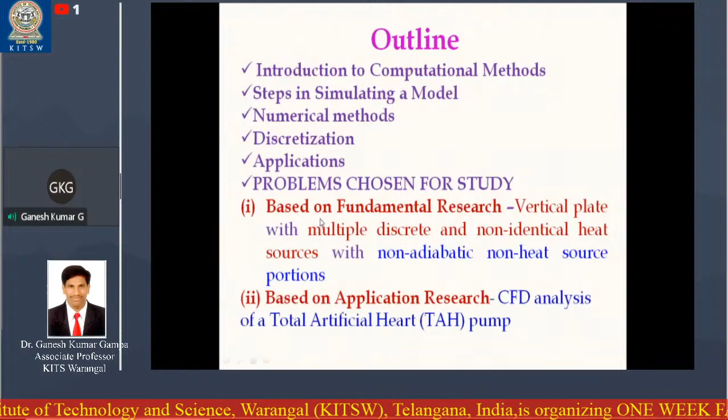Teachers, the outline, keeping in view the junior faculty as well as senior faculty, I'm going to take this brief session considering the introduction to computational methods, steps in simulating a model, numerical methods, discretization, applications. Here I'm going to discuss various problems pertaining to computational fluid dynamics, one based on fundamental research and other based on application research.

First of all, we should understand why computation is required. As we know, nowadays computational methods have become very important, and very exhaustive studies and works are going on in computational studies. The main reason for this is that conducting laboratory experiments is very costly, time consuming, and sometimes impossible. Hence, these methods are used to optimize.

Statistical soundness, and it is used to study heavy systems for which theory is hard, through numerical simulations. Nowadays whatever application, wherever you use it, whether domestic or industry, you can see the applications pertain to purely mechatronic components. A simple fan, in olden days it was a mechanical component, but now we can see it has become a mechatronic component.

And almost all engineers have to come together, and they are doing wonders in this world. So from this I can say that mechanical engineering alone cannot do any project by itself. An interdisciplinary approach is required for studies or making any product in this world. Hence, this computational method is also one of the methods where it brings all engineers together and makes the wonders happen. You can see here how useful these computational methods are, to whom they are useful — I can say it is useful to all engineers.

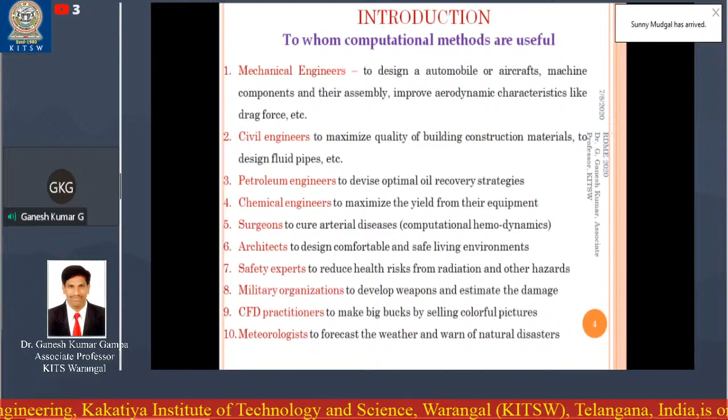The main problem with mechanical engineering automobiles is heating, or heat generation. Heat dissipation has become one of the greatest challenges in this world, not only in mechanical automobiles but also in aircrafts, and it has become more challenging in electronic components. This is where mechanical engineers come into picture, where we need to decrease and dissipate the heat generated in the systems as much as possible to increase the life of the component.

For civil engineers also, computational methods are used to maximize the quality of building construction materials, to design fluid pipes, etc. For petroleum engineers, it is suitable to devise optimal oil recovery strategies. For chemical engineers, it is used to maximize the...

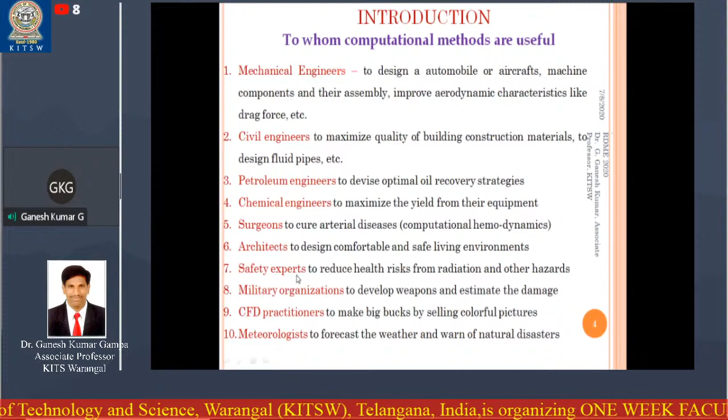Coming to surgeons, you can see nowadays total medical research is playing a very important role, and almost all medical applications are mechanical and electronic applications. Like if you take a simple ECG machine, in olden days it was mechanical, but nowadays again it has become a mechatronic component. So all the engineers have to come together so that we can do miracles.

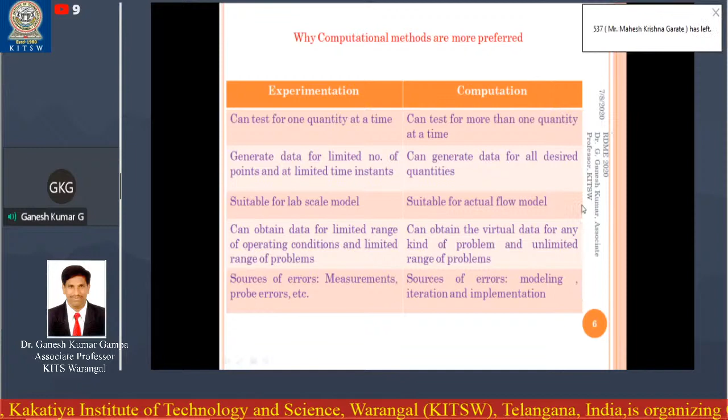What is the difference between computational methods and experimentation, or what are the advantages or limitations of each? The main advantage of computation is we can test more than one quantity at a time, whereas for experimentation, only one quantity at a time can be tested.

In case of experimentation, we can generate very less data, whereas in case of computational methods, almost all desired quantities are possible if the coding is performed well, if you are expert in coding.

In the lab scale, we can have only one or two models, whereas in computational methods, the actual or full flow model can be obtained. The operating conditions are limited in case of experimentation, whereas there is no limitation for operating conditions in case of computation.

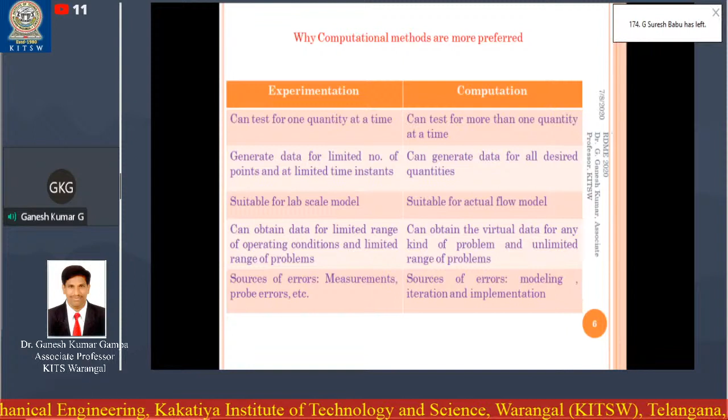The main sources of errors occurring in computational methods are modeling, iteration, and implementation. Whenever you do modeling, you should take care to understand the basic concept, formulate the problem, define the problem, sit with the analysis person, and then proceed. Otherwise, there will be a lot of problems in getting errors.

Coming to the sources of errors in experimentation, these are measurements, probe errors, etc. Whoever deals with computational methods or computational fluid problems has to come across all these.

These are the steps we need to undergo whenever we do the simulation model. The first is problem formulation, then geometric modeling, defining the computational domain, specifying initial and final boundary conditions, grid generation, setting up the simulation, performing and monitoring the CFD simulation, examining and processing the results, post-processing and generation of reports.

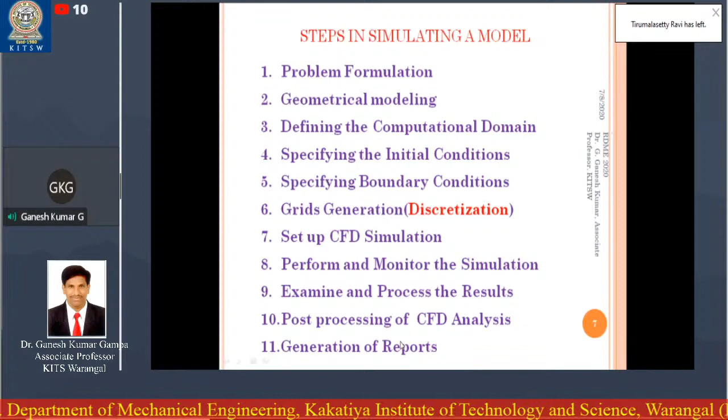So here we are going to discuss all these 10 or 11 points in detail for the next part.

In order to explain the concept of a flow problem, or the CFD procedure, I am taking a small example here. You can see the figure. This is nothing but an aerofoil, which is used in aircrafts. I have taken simple figures here to explain the concept or procedure of CFD.

First of all, you should know what is CFD, and what is the objective. You have to define the objective. What are the input parameters? What are the output parameters you need? What is the geometry? You have to define and formulate the problem.

This definition and formulation of the problem is the first step, where you should sit together with all the engineers and decide the component. Otherwise, you are not going to get better results. So formulation plays an important role

whenever you start doing the CFD analysis or CFD modeling. Here, first of all, you should know the parameters - which are input parameters, which are output parameters, what are the fixed parameters, variables, etc., to be defined in detail for this particular problem. Otherwise, you will not be able to get good results, and the results will be of poor quality.

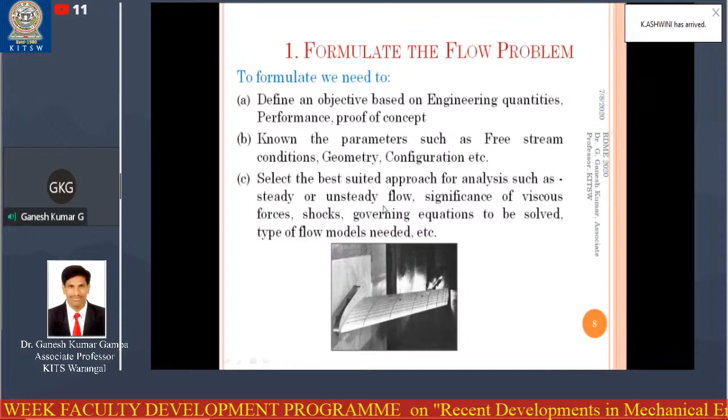Generally, based upon the formulation, we should select the best suited analysis method for us, as there are many analysis methods, based upon the problem parameters, etc.

On geometric modeling, this is another very important technique we need to take care of while making the component. We should understand the geometric features of a component which we are going to design, manufacture, or analyze, like the leading edge, trailing edge, curvature, shape, size, dimensions, etc., to be defined well in advance in order to design.

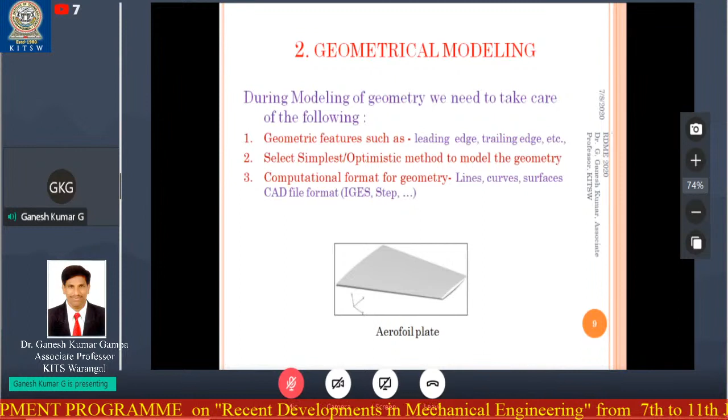We should select the simplest or optimistic method to model the geometry. For that, you should understand all the geometrical models available in the market, and the computational format of the geometry suitable for our problem, like a CAD file, which you can make in Catia, ANSYS, SolidWorks, Pro-E, etc.

You should define your own domain based upon the application, and this domain changes based upon the application you are considering. The domain can be a body, a fluid flow, or a surface. The body is the part, and fluid flow is where fluid particles affect the part, inducing pressure due to drag force, which depends on the fluid particles. The fluid particles depend on various parameters like velocity, viscosity, etc.

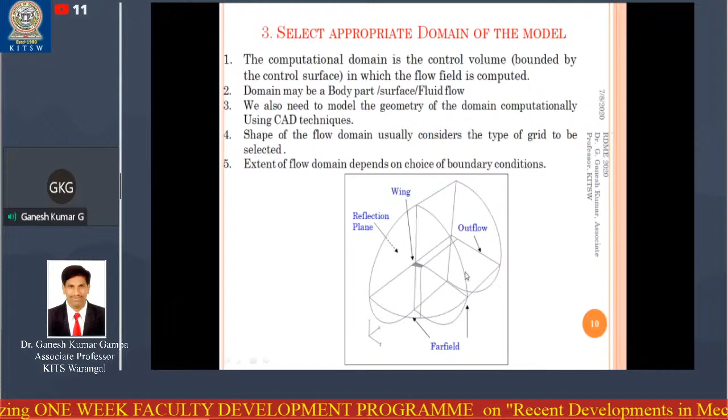We also need to model the geometry of the domain computationally using CAD files, shape the model, and extend the domain depending upon the choice of boundary conditions. The boundary conditions are to be defined by yourself. You have to check the existing domain, the virtual domain, and based upon that divide this domain into a number of zones to make the program run easily.

Once the domain is decided, you need to go for the generation of grid. The grid consists of finite volume cells on which the CFD equations, generally Navier-Stokes equations, which are the fluid flow equations, are approximated. The fluid domain is divided into a number of zones to simplify grid generation, reduce memory requirement, and divide the grid for parallel computation.

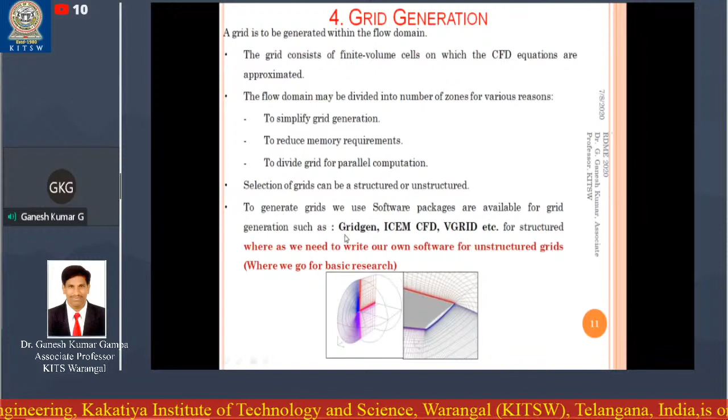The selection of grids is very important, that is, it can be structured or unstructured. To generate structured grids, we have a lot of software packages like Gridgen, ICEM CFD, VGRID, etc. Whereas for unstructured grids, you need to make your own model, your own software, and your own analysis and results. Here we are going to discuss both examples, one with respect to structured grids and the other with respect to unstructured grids.

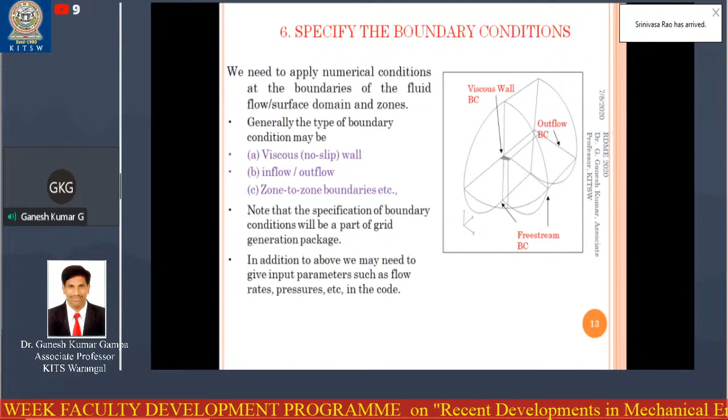Once the grid generation is performed, we need to specify the initial conditions as well as the boundary conditions. Initial conditions mean whether the fluid flow is uniform or varying, or is the free stream, or an auxiliary program. If it is an unstructured grid, you have to make your own auxiliary program to increase convergence. Once the initial condition is defined, like the time is given at t equal to 0, similarly we should specify various boundary conditions for the given model.

Like for example, the no slip condition, inflow or outflow, or zone to zone boundaries. Once the boundary conditions are specified, you have to establish the input parameters as well as the output parameters which are to be considered in order to do the analysis.

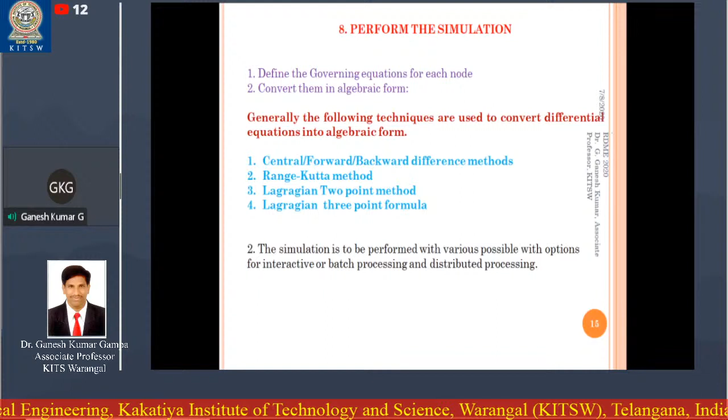Generally, once these input parameters and output parameters are decided, we need to define the governing equations of each node. These governing equations can be directly used in a CFD fluent model, whereas if you take unstructured grids, we need to have our own governing equations and convert these governing equations into algebraic form. There are different methods to convert these governing equations into algebraic form, like numerical methods.

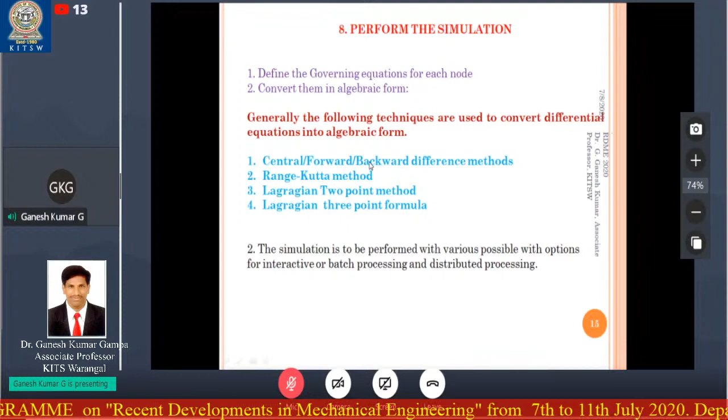These are nothing but the numerical methods, like central or forward or backward difference method, Runge-Kutta method, Lagrangian 2-point, Lagrangian 3-point. Various mathematical methods are available to convert these governing equations of the fluid flow equations or the governing equations of the surface into numerical algebraic equations. Once these equations are converted, a simulation model can be prepared based upon batch processing and distributed processing.

I have already told you we need to convert the governing equations into the algebraic form. To convert these governing equations into algebraic form, we need to use numerical methods. The numerical methods we are considering here are finite difference, finite element, and finite volume methods - these are the three methods which are generally available nowadays. Most people use these three methods in order to solve any type of computational problem in this analysis.

If you discuss the finite difference method, you can see it is a robust and simple concept, easy to parallelize, and regular grids. Here these finite differences are used for one-dimensional or two-dimensional analysis of elements. Generally this is used for applications such as time-dependent partial differential equations, seismic wave propagation, geophysical fluid dynamics, Maxwell's equations, ground penetrating radar.

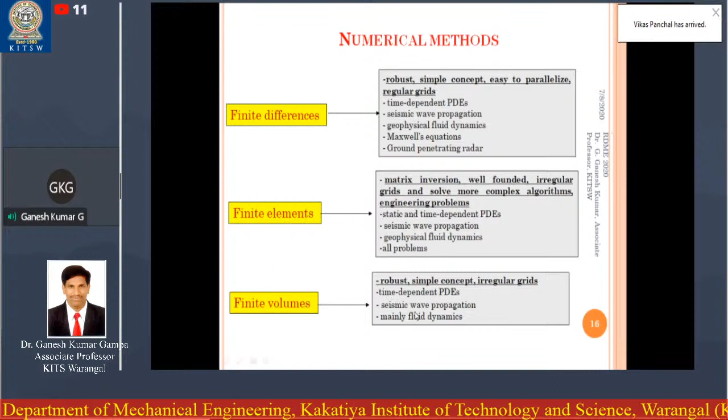Whereas finite volume is another type of numerical method, which is again similar to finite difference, or an extension to finite difference, we can say, where it is also a robust, simple concept. But in contrast to finite difference, here we can do the analysis for both structured as well as unstructured, or regular as well as irregular grids. That is the flexibility which we have when we go for finite volume method over the finite difference method.

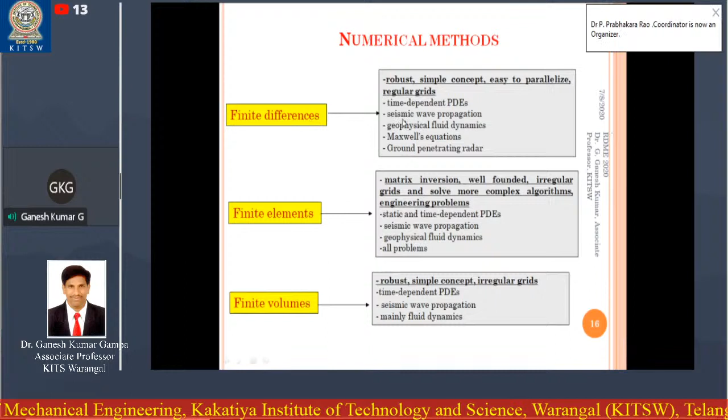And here also, whatever applications we use for finite difference, all those applications can be done in finite volume. In addition, it is most suitable for fluid dynamics.

Coming to finite element method, here we are not going to discuss much about this, but still we can say this is suitable for designing machine devices, and it is suitable for the most critical problems and complex problems, static and time-dependent partial differential equations, and geophysical fluid dynamics, seismic wave propagation, etc.

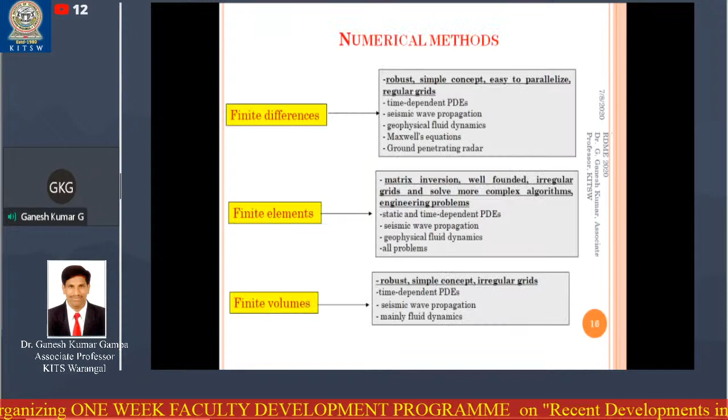So once we establish the input parameters, once we define the governing equations, we need to convert these governing equations into various numerical methods as well. So in order to understand, I have already told you this numerical conversion is to put it into algebraic form.

We use these three methods, and the first method is nothing but the finite difference method. The most easiest way to convert the governing equations into algebraic form is forward difference, backward difference, and central difference. You might have studied this in your intermediate or BTech level mathematics, which is a very simple way to convert the governing equations into algebraic form.

You can see this is a type of grid. The center one is i,j, then the right side is taken as i plus 1 in the x direction, comma j. Left side it is... on the top it is i comma j plus 1, and the bottom it is i comma j minus 1. These are the surrounding elements to the element i comma j.

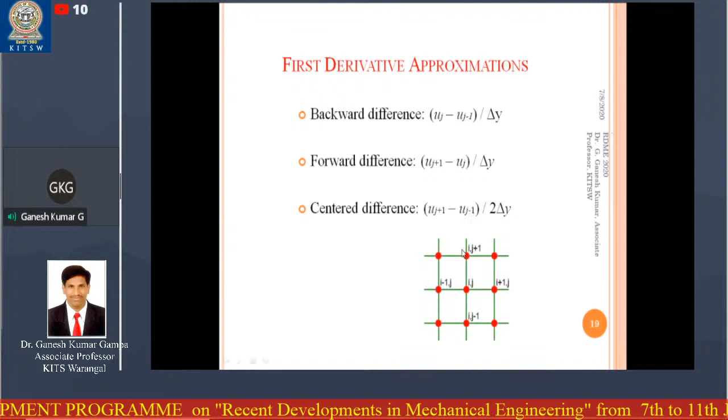If I want to define, or if I want to do analysis, or if I want to impose the governing equations onto the element i,j, I will define this with respect to the succeeding or preceding or top or bottom elements. So for example, if it is backward difference, we define this i,j with respect to i minus 1, comma j. If it is forward, we take i plus 1 as an element. If it is central, i,j will be the center, and it will be defined with respect to the left element and the right element. And these are the expressions which we use to find out, which you have already studied, to find out the properties of an element.

As you can see, this is only a first order differential. If you want to go for the second order derivative, we again do the analysis. Then we get this equation for central difference. Whether it is central, forward, or backward, the equation doesn't change.

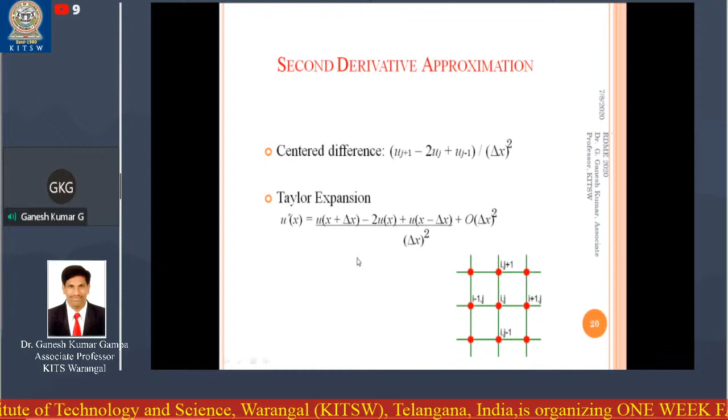This is the second order derivative approximation, and the second one is Taylor series, which we can get from that equation. Again, if you want to define differential dou u by dou t, that is nothing but your velocity, with respect to rate of change of velocity it is delta t coming in the denominator, whereas if it is a length, delta x will be coming into the denominator.

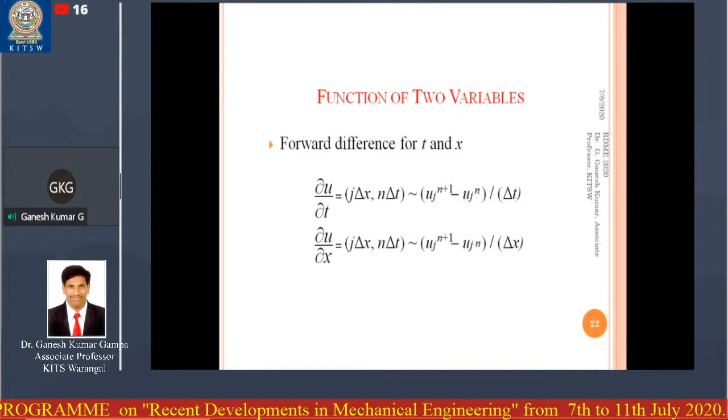Whereas in finite volume method, you go for the mass balance or energy balance or momentum balance. In finite element method, we go for load balance.

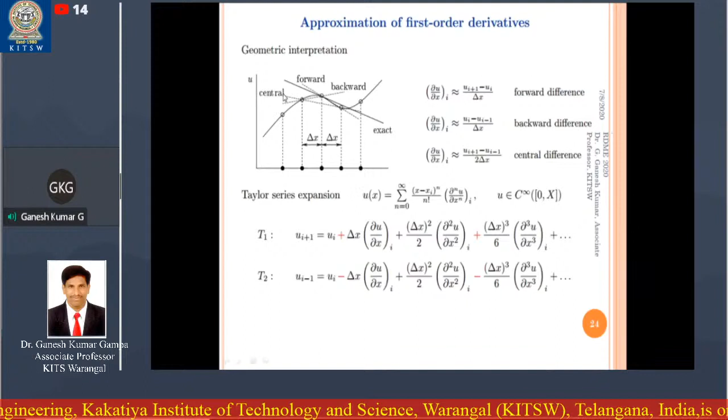These are, you can see this is the figure where this is delta x. Delta x means whatever the elements we have taken here are equispaced elements, that is, the length of the element is fixed. You can see the x-axis is delta x, and y-axis is u. Here he has explained the central, this is a curve. If you define this with respect to this element, this is with respect to central; for this curve, this is with respect to forward element; for this curve, this is with respect to backward element. Like this, you can make the finite differences and finite volume with respect to succeeding and preceding elements based upon the data available.

This is again, I have shown the same thing I am repeating here with respect to the time as well as with respect to the space. This is obtained from the Taylor series, and these are very important to understand in order to solve any fundamental research problem.

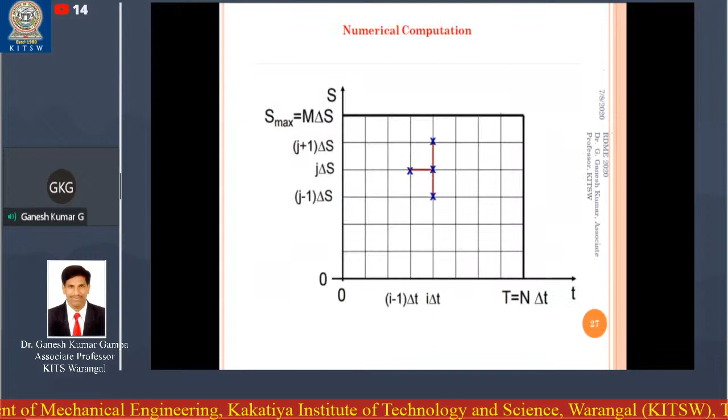The same figure is being repeated. Here you can see whatever the conditions we have taken, it is equispaced, not unequispaced. So the forward, backward, or central difference is suitable for only equispaced but not unequal spaced data.

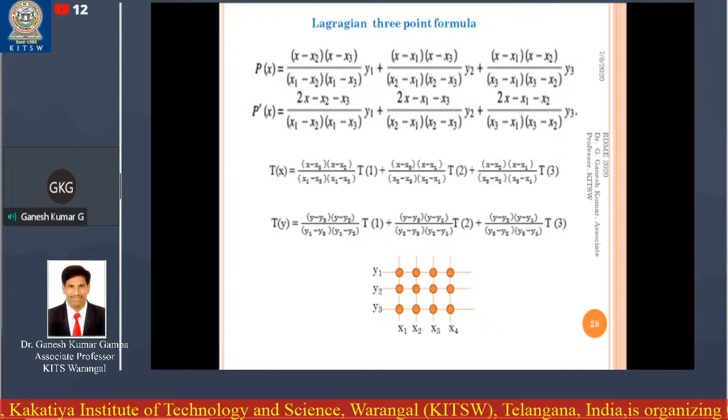So in order to do the analysis where the spacing or the grid is unstructured or unequal space, we go for the Lagrangian 3-point formula. This formula plays an important role where we can define any type of size, any type of structured or unstructured grids, whether the spacing is same or different between the elements. For example, I have given here T of X, that is temperature, T1, T2, T3.

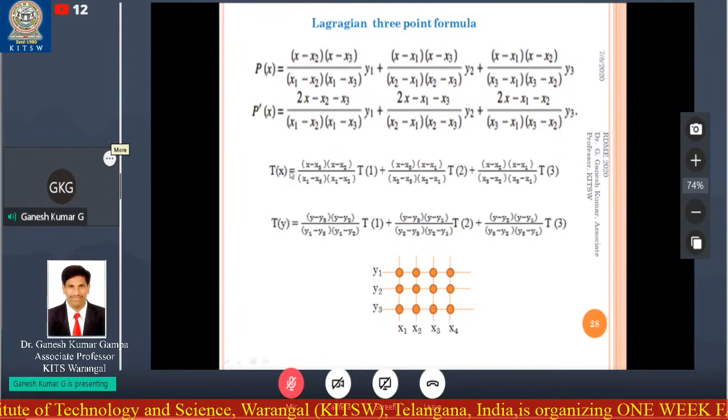You can see T of X is given as (X minus X3)(X minus X2) divided by (X1 minus X3)(X1 minus X2), into T of 1. T of 1 is the temperature of the first element, T of 2 is the temperature of the second element, T of 3 is the temperature of the third element. The temperature we are defining here is in the forward difference. Similarly, this is also a forward difference. We can define the temperature with respect to backward difference as well as central difference.

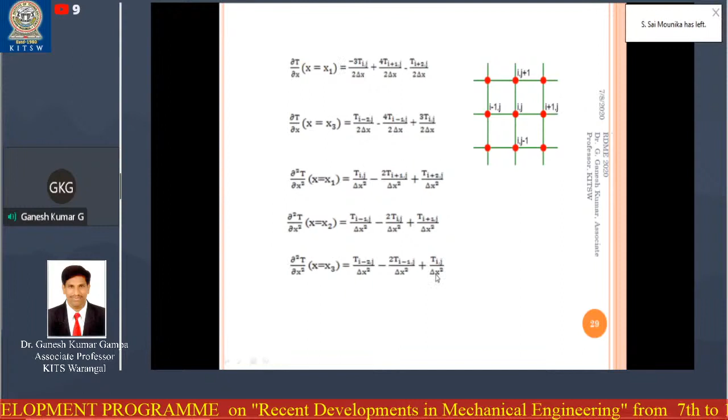If you define based upon the same equations, substituting for equispacing: x1 minus x3 means this is x1, x3 minus 2 delta x; x2 minus x3 that is minus delta x; x3 minus x1 that is plus 2 delta x. If you assume that it is equispaced, then the above equations turn out to be the same thing, and we get the same equations whichever we have used, forward, backward, or central difference.

The general applications of this fundamental research are solar collectors, IC engines, gas-cooled nuclear reactors, measurement of velocity using hot wire anemometer, and cooling of electronic component devices as well as aircrafts, etc.

Before going further, we are going to discuss simple problems based on finite difference and finite volume methods. In the finite difference method, I will discuss three different problems: one with respect to a simple one-dimensional problem, a second with respect to a two-dimensional problem, and a third with respect to a three-dimensional problem. This pertains to the fundamental research.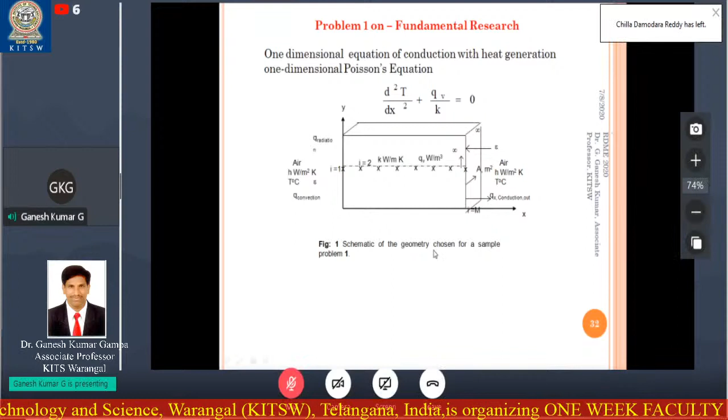The first thing is we should define the problem clearly and understand it, otherwise we cannot solve it. For that, I have taken a simple problem to help you understand the concept of how fundamental research is going to be performed.

Here you can see it is a vertical plate having length L, with heat generated at QV watts per meter cube, and the thermal conductivity of the material is assumed to be K watts per meter Kelvin. The heat generated is dissipated to the left and right surfaces by convection and radiation. The plate has an emissivity epsilon, and we have neglected the y and z directions.

If you consider the elements from I equal to 2 to m, with m minus 1 elements, the heat transfer is due to conduction, and there is heat generation. Assuming it is a steady state, one-dimensional equation, the y, z, and transient condition dT by dt will be eliminated, and the equation turns out to be this one.

This is a one-dimensional plate where heat is generated and it is exposed to the atmosphere on the left and right surfaces. It is assumed that the left and right surfaces are exposed to convection and radiation, the surface has emissivity epsilon, and the heat transfer coefficient H is taken as the heat transfer coefficient of the air.

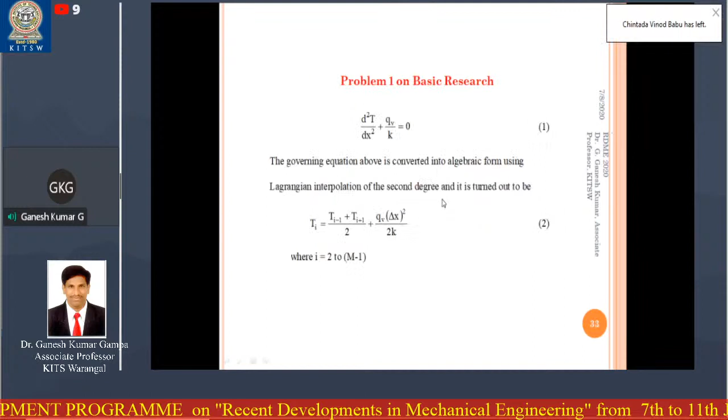Our aim is to convert this differential equation into algebraic form using the Lagrangian 3-point formula. Assuming equal spacing delta x, I get the temperature of element I with respect to the preceding and succeeding elements by this equation, which includes QV into delta x squared by 2k.

By this equation, we can find out the temperature at any point from I equal to 2 to I equal to m minus 1.

If you consider the left boundary, that is I equal to 1, it is exposed to the atmosphere, and heat is transferred due to convection and radiation, whereas on the right side it is due to conduction.

We take the half element as delta x by 2, and this is the heat that is generated. If you apply the energy balance, convection, radiation and conduction are outside, whereas the heat is generated inside, and this is the energy balance equation we obtain.

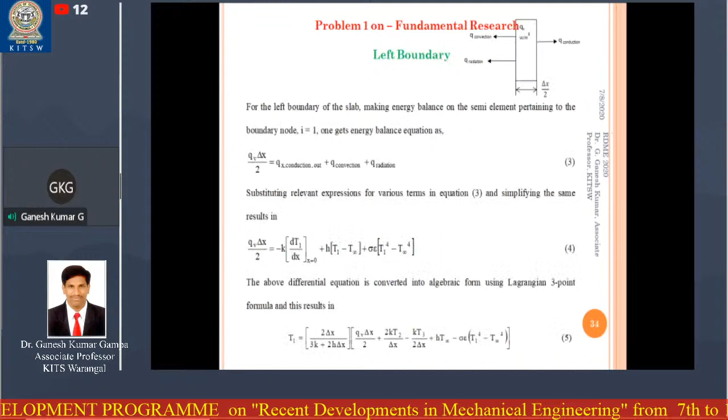The conduction equation is minus k dT by dx, the convection is HA delta T, and the radiation is sigma epsilon times T1 power 4 minus T infinity power 4. Our variable is T1 or Ti, which we need to find out. If you solve this equation and substitute dT by dx using the finite difference method, you get the algebraic equation for the temperature on the left surface.

Similarly, we can apply the energy balance on the right surface also. Once you apply the energy balance on the right surface, you will get a similar equation for Tm. And now we have 3 equations to solve this problem.

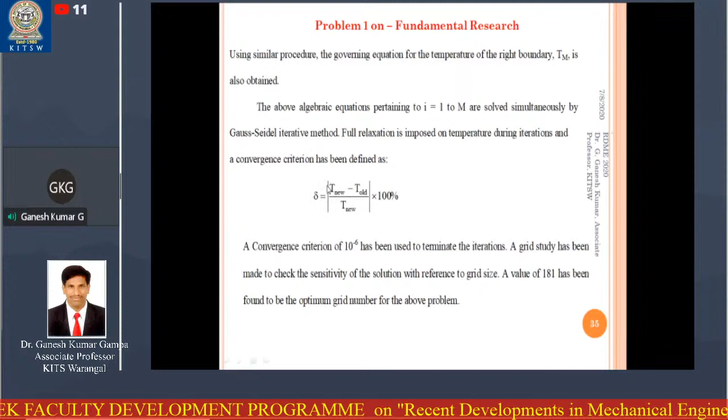We write a code in C language using this, and we give the relaxation parameter as full relaxation, that is delta equals T new minus T old by T new, which is the convergence criteria we have taken. T new means present, T old means initialization. Initially we initialize the temperature by either atmospheric temperature, 0, or anything else. But when we use an iterative solver, that is the Gauss-Seidel iterative solver, the number of iterations may increase, but finally you will get the final solution.

The convergence criteria is taken as 10 power minus 6. It means T new minus T old by T new into 100%, should be less than or equal to 10 power minus 6. Then only it will continue in the program, otherwise it comes out. In this way, we can get the temperature at any location in the element.

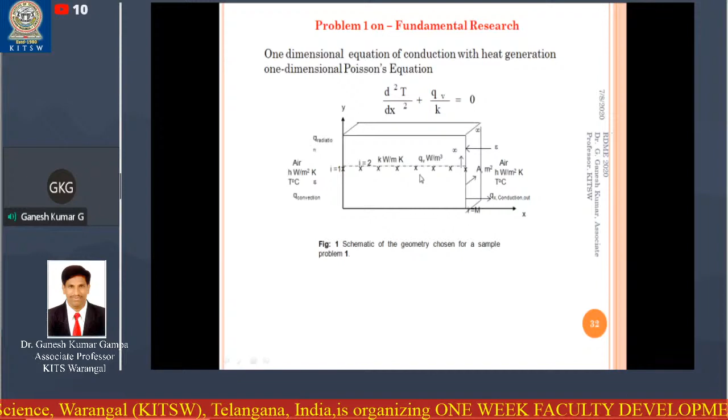This example we took has only one directional flow. But in actual conditions, there will not only be one direction, it is also 3 directions. So we are going to take another example with 2 directions, where you have a plate with length L in the X direction and Y direction, exposed to the atmosphere on 4 sides. Heat is generated, QV in watts per meter cube is the heat generated, and K is the thermal conductivity.

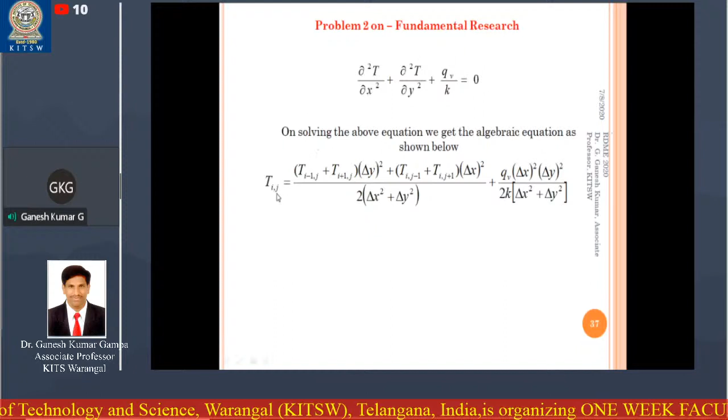If you consider the inside elements, that is I equals 2 to M minus 1, J equals 2 to N minus 1, that is the number of elements in both X and Y directions, these elements are governed by conduction because they are inside the plate. And you know the governing equation for conduction in 2 dimensions under steady state conditions. This governing equation is converted into algebraic form to get the temperature at any location.

The similar methodology we used in the previous case can be used here also, but the governing equation changes. As the governing equation changes, naturally the temperature at various locations changes.

This is again similar to the right boundary I have taken. In the first case I took the left boundary, but here I take the right boundary for the energy balance. If you take the right boundary, there is conduction in and conduction out, which is the net rate of heat transfer along the Y direction and the X direction. If you put the energy balance and substitute the conduction equation minus KA dT by dX, the convection equation HA delta T, the net conduction by Fourier's conduction equation, and radiation, substituting all these equations and converting dT by dX into algebraic form, then bringing Tij to the left side gives the governing equation in algebraic form.

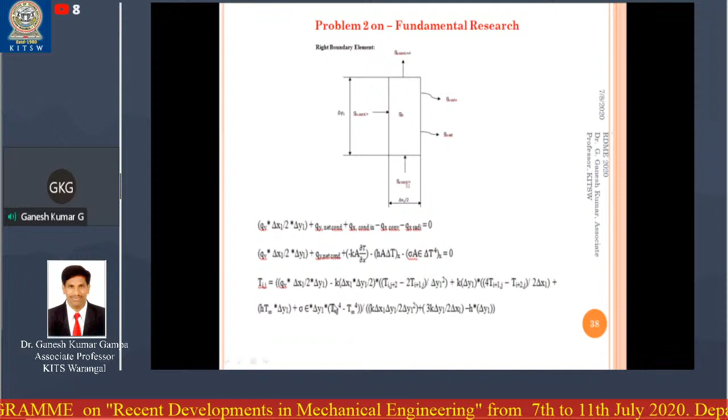This is the temperature on the right boundary, and this is the temperature in the middle. Similarly, you can find out left, top, and bottom also.

So far we have seen 1-dimensional and 2-dimensional problems. Now we are going to come to actual conditions, that is 3-dimensional, where we apply conjugate mixed convection heat transfer problems. I have already mentioned that the finite difference method is used only for 1-dimensional or 2-dimensional components, whereas finite volume is used for most generalized problems where a 3-dimensional solid element is considered. Here I have taken a conjugate mixed convection problem. Conjugate means combined conduction, free convection, and forced convection heat transfer. You already know there are 3 modes of heat transfer: conduction, convection, and radiation.

I am going to take this problem by considering conduction, convection, and radiation. And in the convection, we are going to consider both the effect of free convection and forced convection. That's why we call this conjugate mixed convection, that is combined free and forced convection. Mixed convection can be free, partially free, partially forced, or both may be equal. We will discuss what parameter determines free and forced convection in this problem.

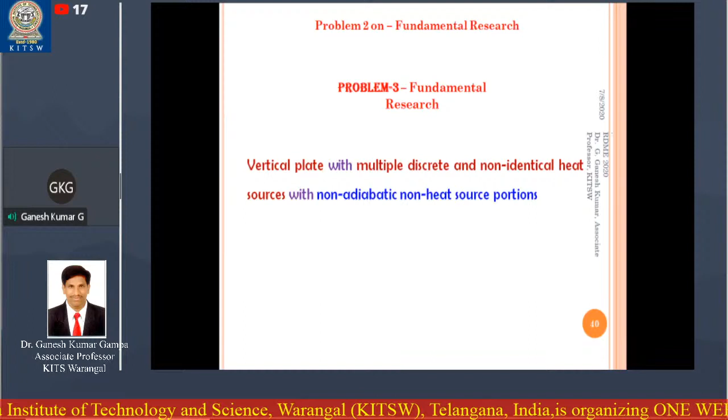In order to solve the problem using the finite volume method, I have taken a simple example again, a vertical plate.

You might have seen this is a vertical plate having 3 different heat sources. One heat source starting from the leading edge, and the second heat source starting from there, then we have seen a non-heat source portion, then heat source portion, then non-heat source portion, then heat source portion. I have already defined a vertical plate with multiple discrete non-identical heat sources, meaning the heat source lengths are non-identical. I have taken the lengths of the heat sources as LH1, LH2, LH3.

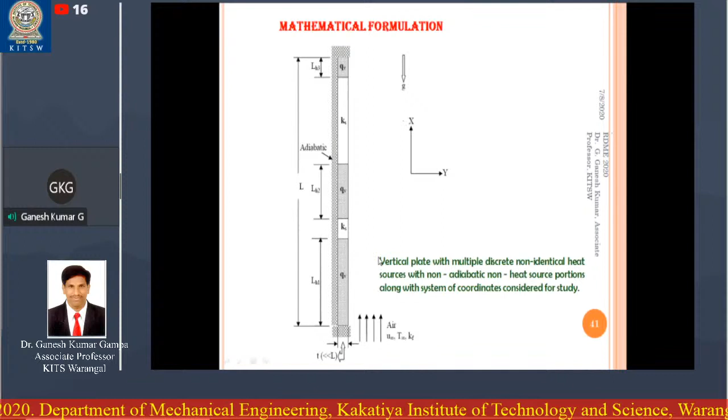You can see on the left, top and bottom surfaces it is made adiabatic, and the thermal conductivity of the material is taken as Ks. The white portion is the non-heat source portion, whereas the hatched portion is the heat source portion. The total length of the plate is taken as L, and the air is flowing over the surface. The x direction is considered in the vertical direction, and g is the acceleration due to gravity. If the air flows over the flat plate...

Since the heat is generated inside the plate, this heat cannot go on the left, top, or bottom, and it only dissipates on the right surface. So we have made the left, top and bottom surfaces adiabatic wantedly, in order to explain the concept of fluid dynamics on the right surface.

I have already told that we need to discuss structured grids or unstructured grids. Structured grids are always uniform grids and uniform shape, whereas unstructured grids can have non-uniform size. Here, for this problem with non-uniform size, we can use the finite volume method only by defining or writing our own code, not by using a predefined problem and implementing ourselves.

This is the plate which we have seen just now, and the fluid is flowing over the flat plate. Now I need to discuss the fluid properties over the flat plate. For that, I have taken a domain. I said that the next step, once the grid is formed, we need to decide the computational fluid domain and the boundary conditions. I've taken the domain here with length L, and also the extended length L.

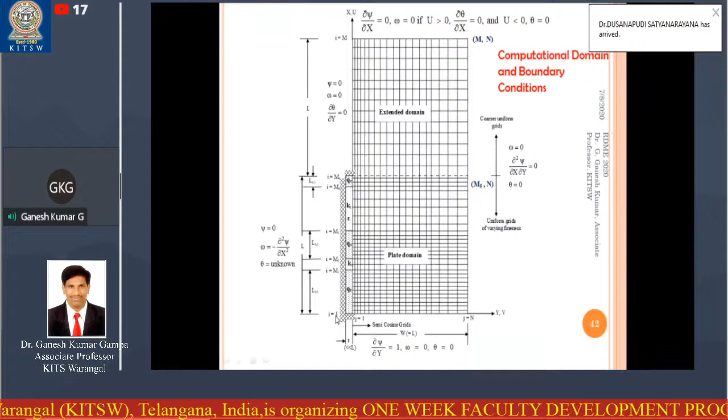We have taken semi-cosine grids, which are not uniform, meaning we need to write our own software, generate our own code, and do our own analysis to get the results. For that, we need to define our own boundary conditions.

These are the boundary conditions which are defined and applied on all 4 boundaries, both in the extended region and plate region. This is called the plate domain, and this is called the extended domain. We have taken coarser grids in the extended domain, whereas finer grids in the plate domain.

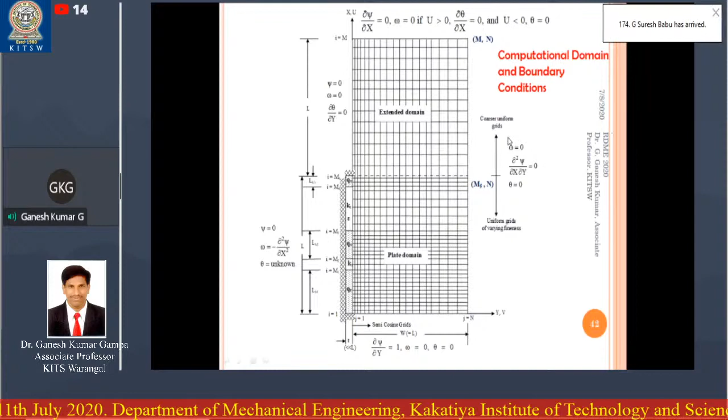Here you can see the bottommost plate surface. These are the boundary conditions I have considered. Left plate region, this is the plate region where you need to find out theta, and this is the extended region, and this is the top boundary region of the extended domain, and this is the right region.

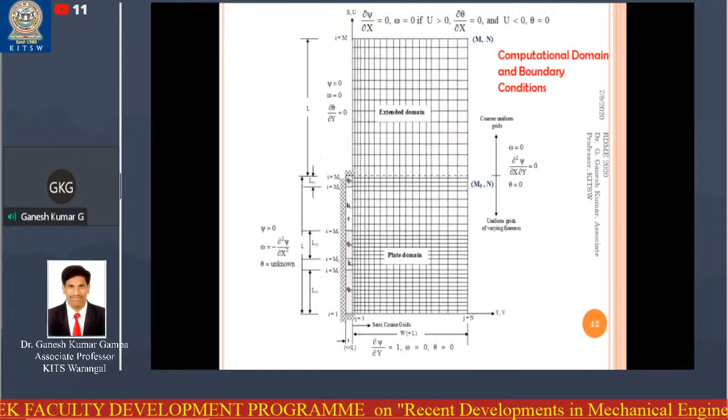You can see these are uniform grids in the x direction, whereas non-uniform semi-cosine grids in the y direction, finer grids nearer the plate and coarser grids away from the plate. We have used a semi-cosine equation to solve this problem. I have already told you that for each and every grid, you have to impose the boundary conditions and the governing equations.

These are the governing equations which we impose on the fluid: the continuity equation, which is mass balance; the x-momentum equation, which is momentum balance in the x direction; the y-momentum equation, which is momentum balance along the y direction; and the energy balance equation. So these are 4 equations.

These 4 equations are converted into three equations by defining terms called stream function and vorticity. The stream function is given by d(psi)/dy equals u, and d(psi)/dx equals minus v. The vorticity equation is dv/dx minus du/dy.

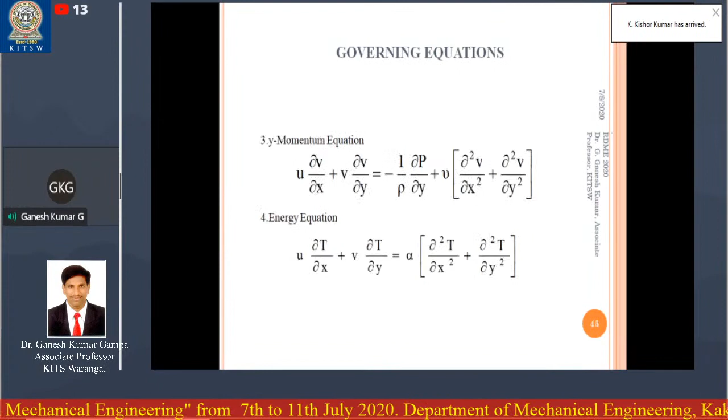Once you substitute these 5 and 6 in 3 and 4, 2 and 3, you will get a dimensional vorticity stream function vorticity equation. This is the dimensional stream function vorticity equation, this is the stream function equation, and this is the energy equation. So the x and y momentum equations are combined to form a single equation. Here we have omega, psi, and t as the three unknowns, and we need to find out the temperature, stream function, and vorticity.

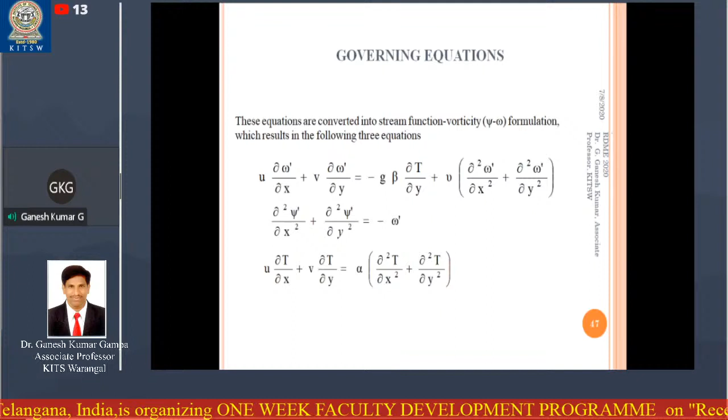These are components of velocities along x and y directions. Any mathematical or heat transfer problem, once you define the equations, you need to normalize them. Otherwise, it will not be a general equation.

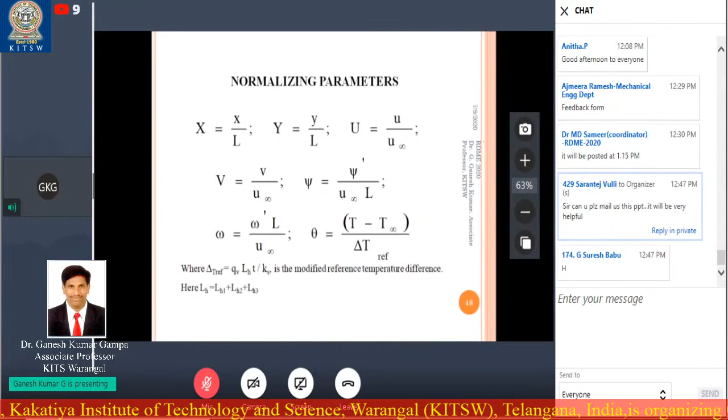And here you can see this is T minus T infinity by delta T reference. We have defined the delta T reference as QV, that is the heat generated, into LH. LH is nothing but the total length of the heat sources, given by LH1 plus LH2 plus LH3, into thickness of the plate by thermal conductivity. That is nothing but QV into volume by thermal conductivity, that is, the total heat by thermal conductivity gives the delta T reference.

Once we invoke those equations, we'll get the vorticity transport equation. This is the equation where omega is the vorticity, psi is the stream function.

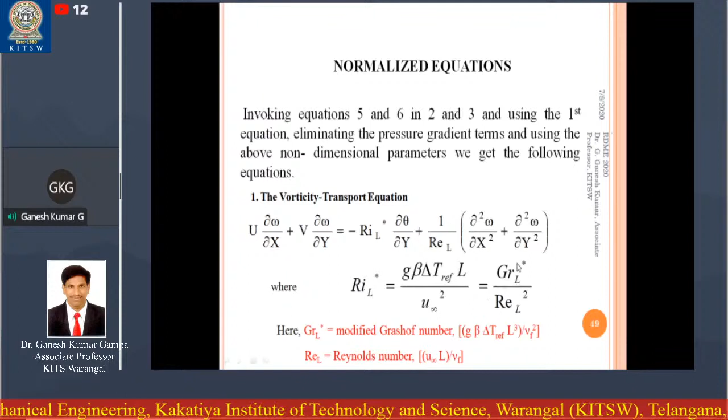And here we get a term called RiL star, which is nothing but the modified Richardson number. This modified Richardson number dictates the type of flow, whether it's free convection, forced convection, or pure mixed convection. If RL star is equal to 1, it is pure mixed convection. If it is less than 1, it is forced convection, and if greater than 1, we assume it is free convection. This is taken as RL star equals G beta delta T into L by U infinity square, which is given by Grashof number by Reynolds number square.

And this is the stream function. And here, in another energy equation, when you substitute, we get the term called Peclet number, which is equal to Reynolds number into Prandtl number.

These three equations are solved by using the finite volume method of Gosman et al., to get omega, psi, and theta at any point in the fluid volume. So what we are going to do is find out psi, omega, theta at any location within the fluid volume.

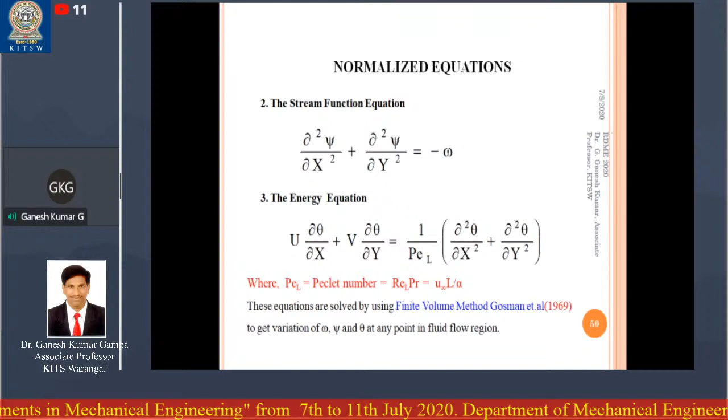Once we get the governing equation, the next step is to convert this into algebraic form. In order to convert this into algebraic form, we can use either finite difference or finite volume method directly. I have used finite volume method of Gosman et al. for this fluid flow problem.

Whereas you're having the fluid region and the plate region, for the plate region, again I have used energy balance as we have done in the first case and second case problems. We can take this as an energy balance of the heat source in a plate: it is adiabatic, convection on the right side, conduction going in, conduction going out, and heat is generated.

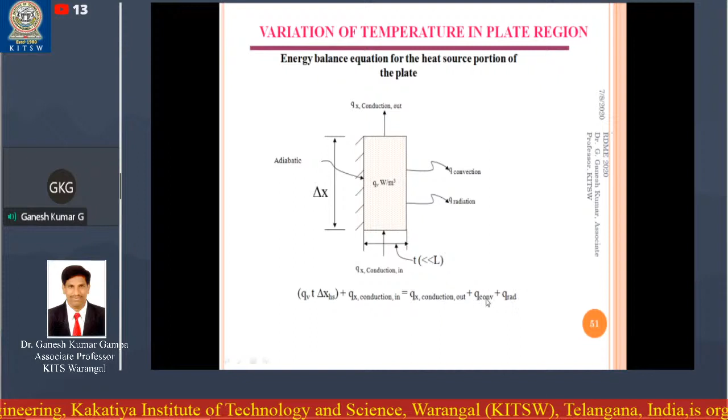Totally, we are considering 3 equations in the fluid region and plate region, nearly 9 equations, 9 plus 3 total, and all the equations are converted into algebraic form. A convergence criteria is applied. For example, for psi: psi new minus psi old by psi new, which is 1, should be less than 10 power minus 4. Omega is 5 into 10 power minus 4, theta is 1 into 10 power minus 4. This is the convergence criteria I have defined based upon the problem definition.

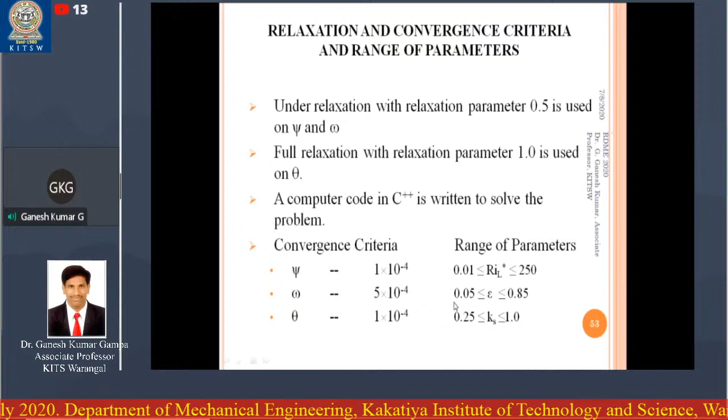And these are the range of parameters which we have. RL star 0.01 is nothing but forced convection, 250 is nothing but free convection. Epsilon 0.05 is the lowest, that is bad emitter, and 0.85 is the excellent emitter, and thermal conductivity ranges 0.25 to 1. This is because the plate we have considered here is mylar coated epoxy resin, which is used in electronic cooling, whose thermal conductivity lies between 0.25 to 1.

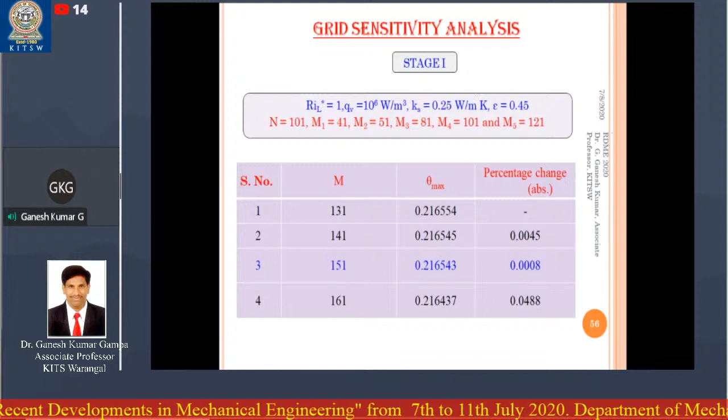Once this equation is done, energy balance is validated with Ramachandran et al. I have already told that the grids are directly structured. If structured grids are there directly, you can use the software. But if it is unstructured grids, which we have defined ourselves, we should do grid sensitivity analysis. If you do not do grid sensitivity analysis, you are not going to get the correct results, and it is not validated at all. So for this, I have done grid sensitivity analysis by fixing the number of grids along the y direction and varying other parameters in the first stage.

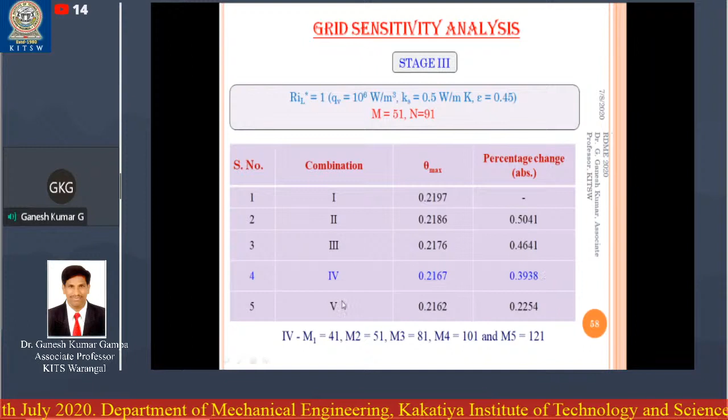Then I got 151 as the number of grids in the x direction. Now I have fixed the number of grids in the x direction and varied the number of grids in the y direction, that is n. Based upon the percentage change, I found that the appropriate number of grids is 91. Similarly, for heat sources also, I fixed the other heat source grids and varied, and I got the number of grids in the fourth combination: 41 in heat source 1, 51 in heat source 2, 81 in heat source 3, 101 in heat source 4, like this. These are the final number of grids obtained by grid sensitivity analysis.

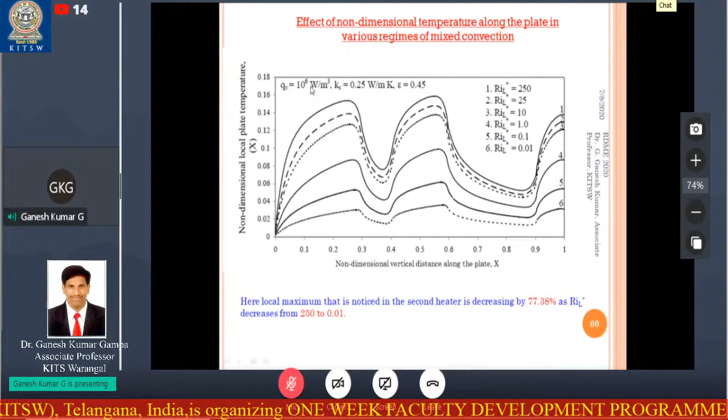Once the grid sensitivity analysis is done, here I am going to discuss a simple example. I studied and learned the program by taking Ri L star from 250 to 0.01. 250 means the free convection mode of heat transfer, 0.01 is the forced convection mode of heat transfer, for which I fixed these parameters: the heat generated inside the plate, the thermal conductivity, and the surface emissivity. Based upon this study, I got results like this. You can see the temperature increasing, reaching maximum, then decreasing, and again reaching maximum and decreasing. This is because of the heat sources available at various locations.

Similarly, you might be thinking that radiation may not be more effective in electronic cooling. In order to explain the concept and role of radiation, I took epsilon equal to 0 and epsilon equal to 1, and it is found that the effect of radiation is more in the case of electronic cooling, with the role being around 30%.

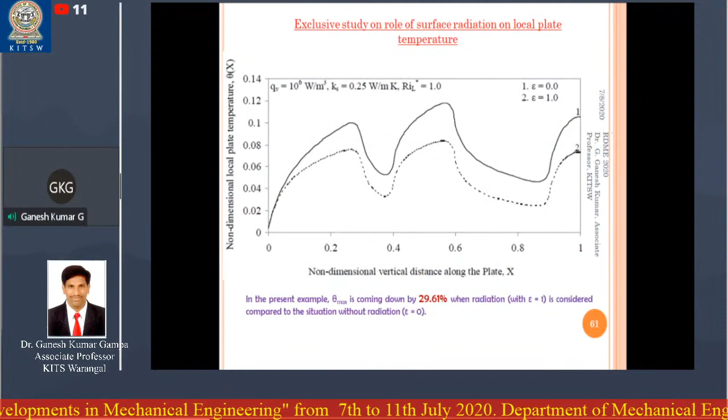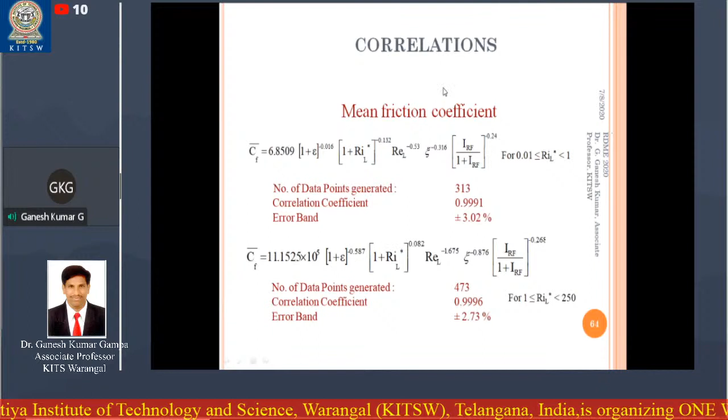So this is with respect to fundamental research. Still now we have seen only the fundamental research. Now, in actual conditions, sometimes we may come across the actual conditions.

All of you please see this. Is it audible? Is there any settings to be performed? I think here it is not there. Okay sir, go ahead. Now is it audible?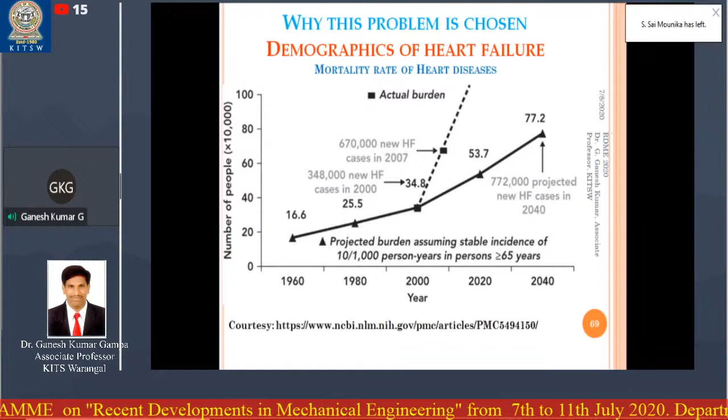Why is this very important? You might have seen this: the heart failure rate has been increasing drastically from 1960 to till 2020. In order to decrease this heart failure rate, this project was introduced, to get the product in the market with lower cost and suitable for Indian people. The main reasons for heart failure are loss of pumping ability, stress, and lifestyle factors like smoking, being overweight, eating habits, etc.

These are the conditions that may lead to heart failure: artery disease, past heart attack, high blood pressure, abnormal heart valves, heart muscle issues, heart defects, severe lung disease, diabetes, sleep apnea. Now, just see this video.

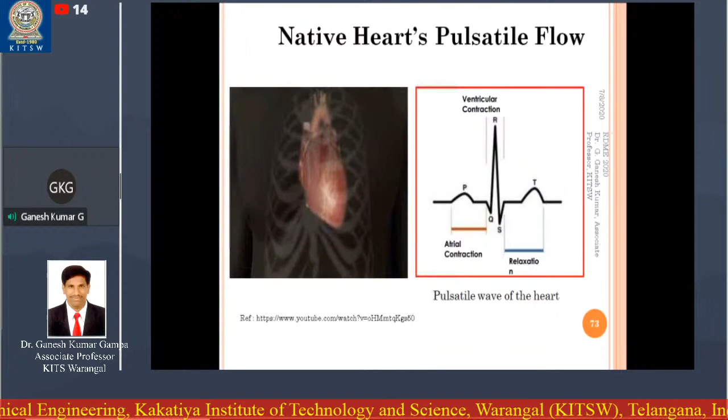This is nothing but the pulsating heart function, or the working function of a heart. We can see on the right side a signal showing how the heart signal is produced. It is just pulsating, a pulsatile wave that is induced in order to circulate the blood, or pump the blood. So here, in order to pump the blood, we use this component, the left ventricular assist device.

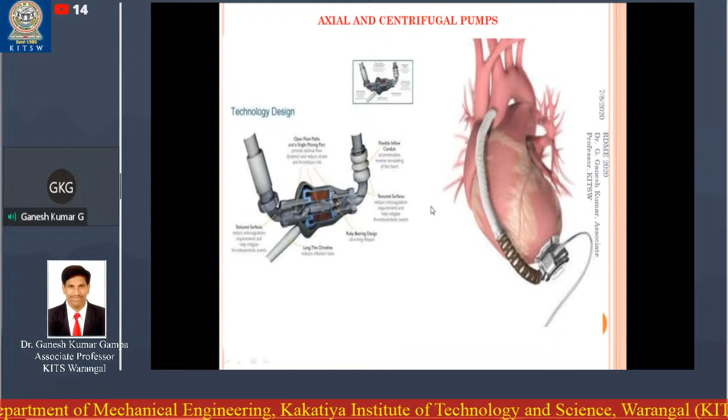In order to pump the blood, as I just mentioned, there are two types of blood pumping devices: one is the pulsating device, the other is the continuous device. These are the two components, axial continuous rotary or reciprocating devices, which we use to pump the element. This is nothing but linear displacement and rotary displacement, that is, the axial flow pump and the centrifugal pump I just showed.

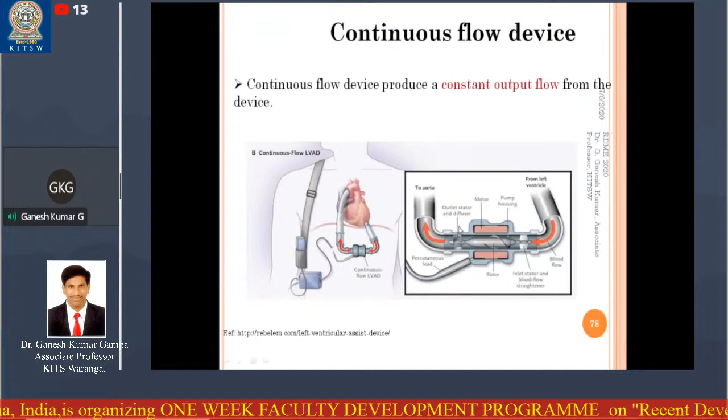And this is the pump location in the heart. This is an example of a continuous flow device, which we use in our applications for the total artificial heart.

How was this total artificial heart started? In the first generation, it initially started in the 1970s, and Mr. Jarvik was the first person who introduced it into the market. In the first generation, he used it as a pulsating pump. But there were a lot of disadvantages with this, and they proposed to go for a continuous pump in the second and third generations.

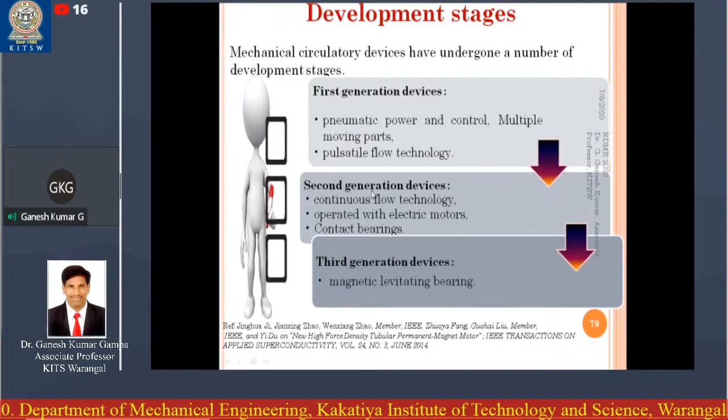In the first generation, they used pneumatic power and control, multiple moving parts, and pulsatile flow technology. In the second generation, they used continuous technology, but contact bearings were used. These contact bearings were later replaced by magnetic levitation bearings.

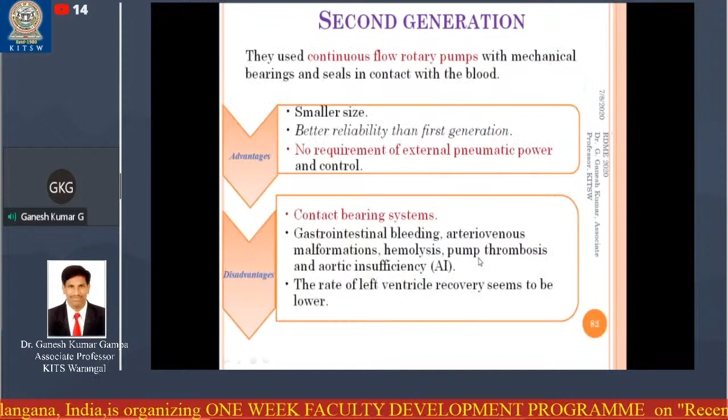Then in the second generation, continuous flow pumps were used. The advantage of this is smaller size, better reliability, and no requirement for external pneumatic power and control. Whereas with contact bearings, the main problem is that they kill the cells. In the third generation, it's the same as the second generation, but the contact bearings are replaced by magnetic bearings.

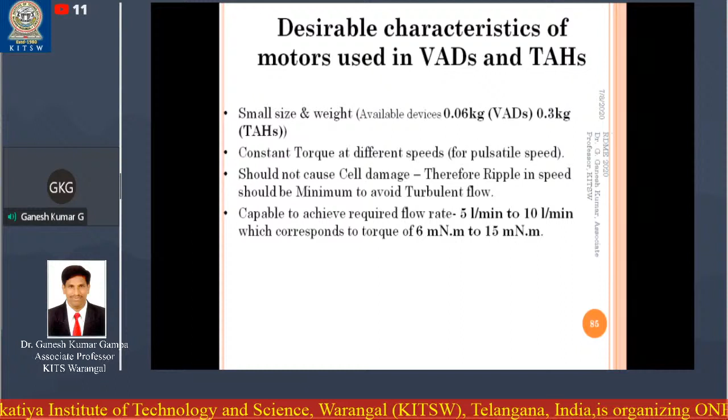The role of the mechanical engineer here is to control the fluid flow, to do the analysis of the fluid flow. You can observe that the fluid flowing here is blood, which is a non-Newtonian fluid, and hence making analysis of a non-Newtonian fluid in CFD is application research. It is very critical, and this problem is being performed in our institute in collaboration with UPMC.

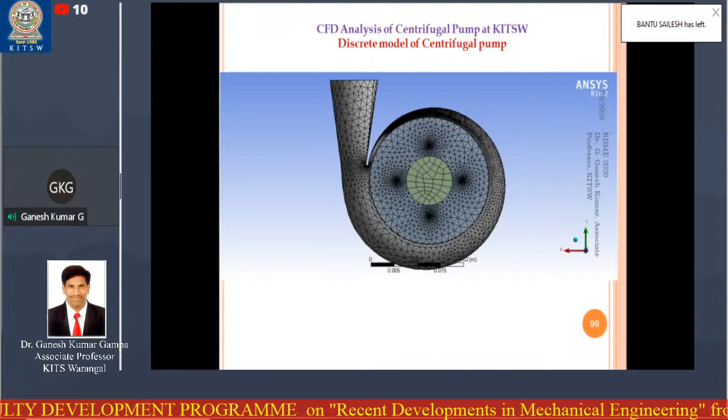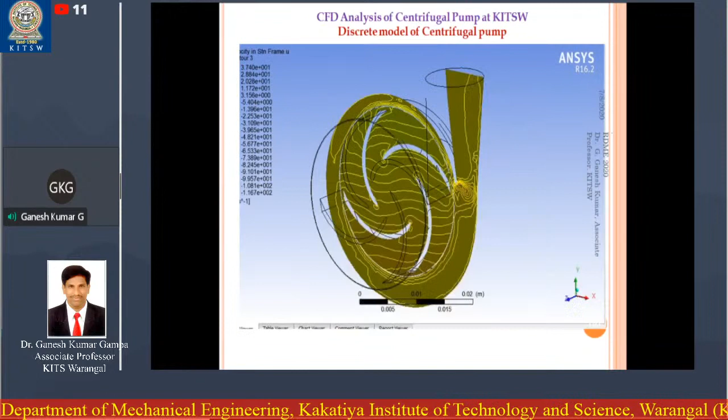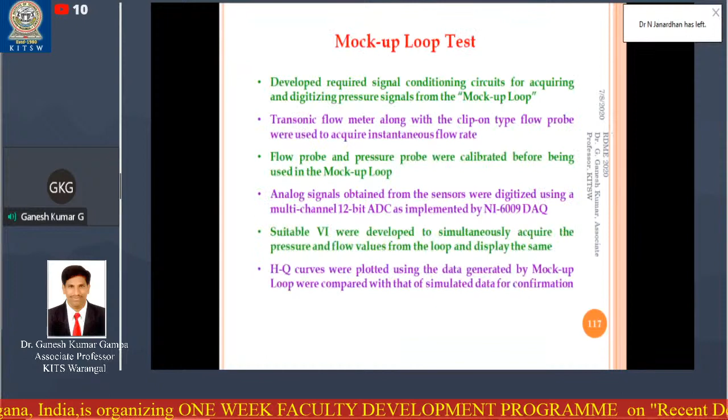And we have set up the mock-up loop test setup in our lab, and we have tested the pump. These are the test methods. This is the circuit diagram where we have used LabVIEW. And this is a model of the pump.